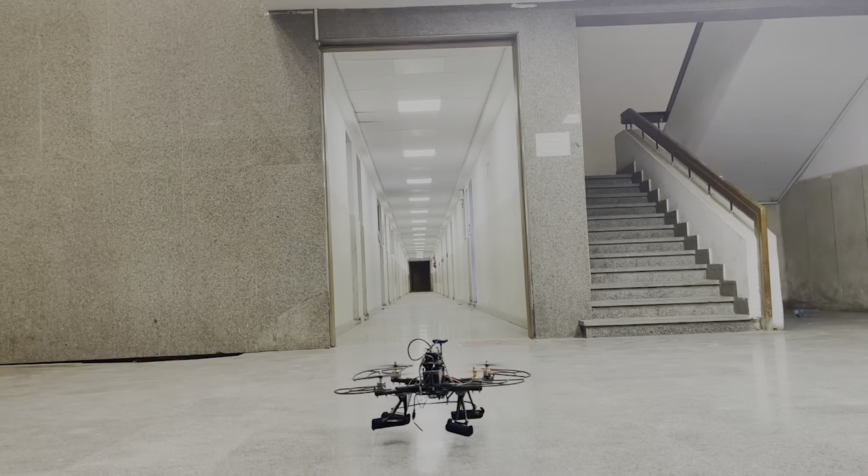I'm Abdul Ghaffar and I have the honor of leading ASU ROAR. As a part of ASU Racing Team, we have always challenged ourselves on the international stages, from Formula Student UK, Shell Eco-marathon, and Formula AI, where we explored autonomous vehicle technologies.

But curiosity doesn't stop. It grows, it evolves. It led us to robotics. That's where we built our ROAR. Behind every great mission, a great team, driven not by years of experience, but by belief, passion, and purpose. We may be young, but together we've built more than just a rover.

It's a vision. ROAR is made up of 6 tightly connected teams. The management team, overseeing planning, logistics, budgeting, and public engagement. The robotics team, focused on building our evolving manipulator and end effectors. The mechanical team, developing and validating the rover's structural and mechanical systems.

The electrical and low-level control team, powering and connecting all the rover's systems through PCB design, embedded control, sensor interfacing, and battery management. The autonomous system team, building the system of the rover by integrating computer vision, sensor fusion, path planning, and control algorithms into a cohesive autonomy stack.

Our newly formed science team, conducting field experiments for rock classification, pH analysis, and biosignature detection. The drone team, designing, assembling, and testing drone hardware while developing software for autonomous flight and mission programming. Each of us brings something different to the team, but we all share one mission: to face new challenges.

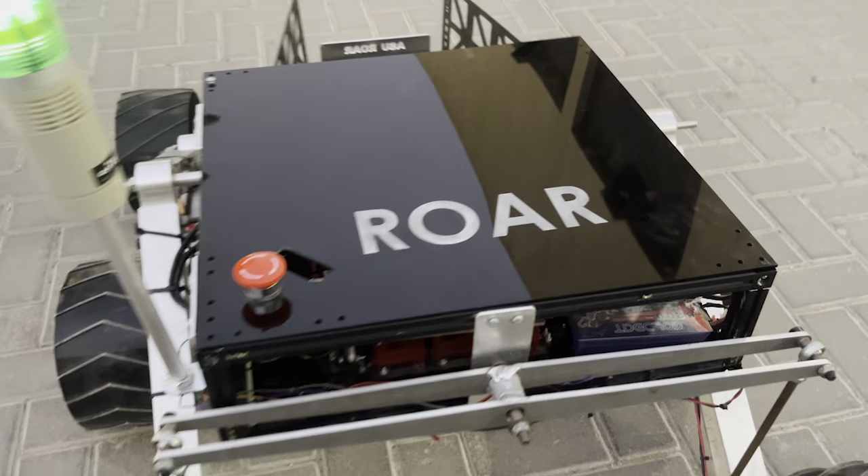That's why we found the European Rover Challenge, a competition that pushes us beyond anything we've done before. To us, it's more than just a competition. It's a chance to design a rover that's ready to take on the unexpected and to become one of the first Egyptian and African teams to compete on site. We're not just here to compete, we're here to collaborate, learn from one another, and stand among the best innovators in the world.

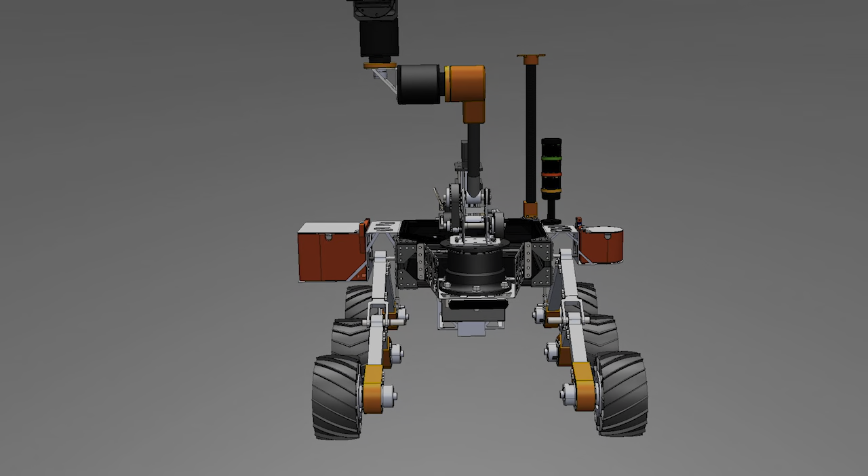Our mechanical system is designed with a focus on adaptability, practicality, and ease of integration. The structure uses a modular layout, letting us reconfigure the rover for each ERC task. The rocker-bogie suspension is used for passive terrain adaptation, helping maintain ground contact over rough surfaces without active control.

One of our main upgrades this season is our newly designed wheel assembly, focused on structural strength and durability, and is now ready for manufacturing. This year, we've added a new drilling mechanism and storage mechanism to be able to do all the ERC tasks. Altogether, the mechanical system reflects practical design choices and steady development, aimed at reliable operation at the competition.

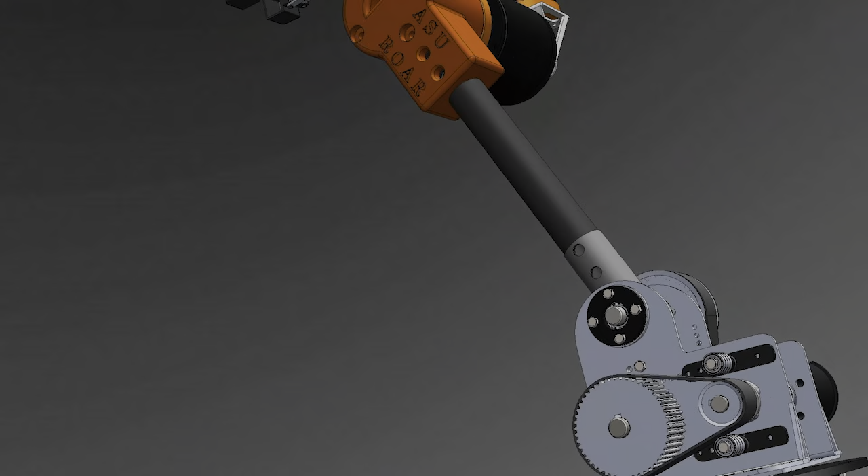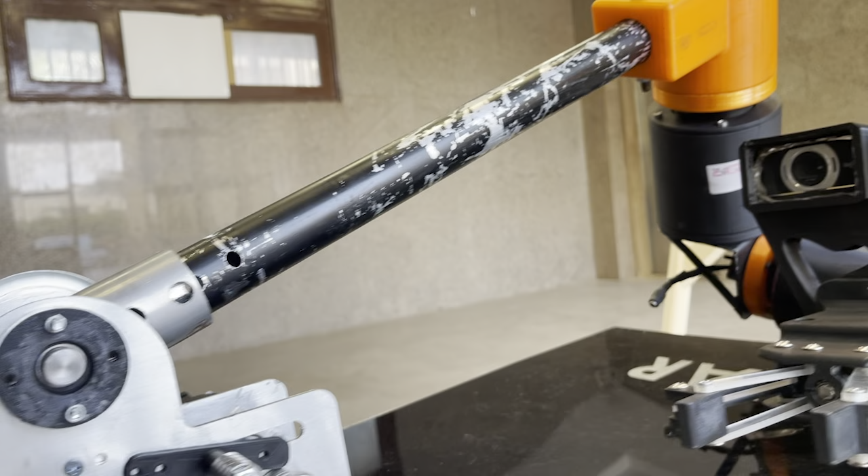From switches to rock and sand samples, every precision task relies on a capable, well-engineered robotic manipulator. Our 5 degrees of freedom robotic arm has come a long way since its original design developed last year. This season, we have re-engineered key joints for higher torque and improved stability, integrating cycloidal gears and custom double-stage belt drives with optimized gear ratios. These upgrades reduce backlash and enable smoother motion under load.

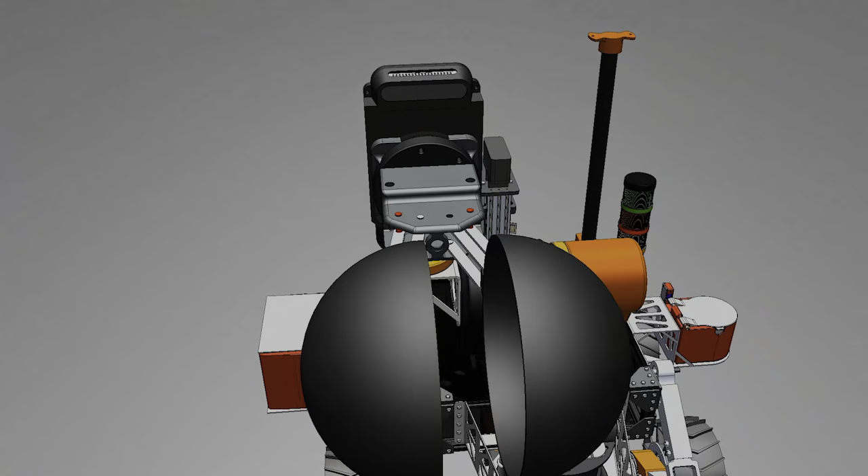To meet the varied demands of ERC tasks, we have designed modular end effectors that can be swapped quickly, enabling the arm to handle sampling tools, control panels, and scientific instruments with precision. Most of the components are being designed and manufactured in-house, giving us full control over tolerances, performance, and integration. The cycloidal joint is currently under active design and testing.

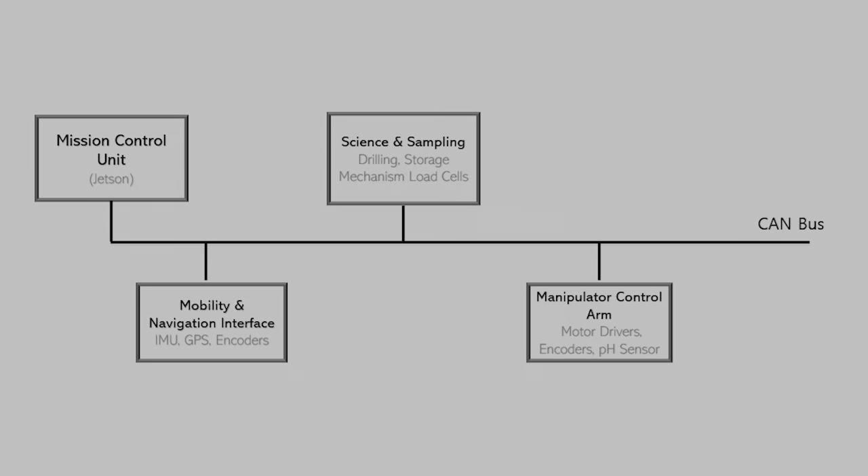Rover uses CAN-based architecture based on STM32 microcontrollers. Each node controls a specific subsystem and communicates over a shared CAN bus. Each subsystem is implemented on a custom-designed board. The boards are equipped with the necessary communication, power management, and control elements based on the subsystem's requirement. The layout was optimized for minimal noise and efficient routing.

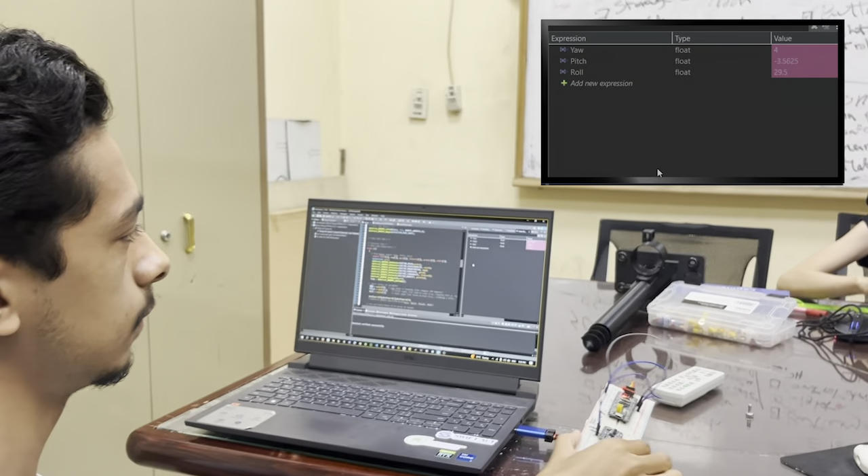Our system includes various sensors used for navigation, environment monitoring, and scientific tasks. We made sure each sensor is properly connected and tested under real-world conditions. Calibration was done to ensure reliable measurements, which is crucial for autonomous operations and task accuracy during the competition.

Power is supplied by lithium-ion battery packs managed by a smart BMS. Using a Bluetooth app, we monitor cell voltage, temperature, and state of charge in real time. The system ensures safety and logs any faults during operation or charging.

At ASU ROAR, intelligent navigation is key to mission success. Our rover is built to explore unpredictable ERC terrain efficiently, safely, and autonomously. It all starts with the A-Star Global Planner, which maps the most efficient path through required checkpoints, optimizing travel time and avoiding hazards. But ERC terrain is dynamic.

That's why our rover perceives its environment in real time. The ZED 2i stereo camera captures dense 3D point clouds, identifying rocks, slopes, and obstacles. This obstacle identification approach is model-free, relying only on raw data processing.

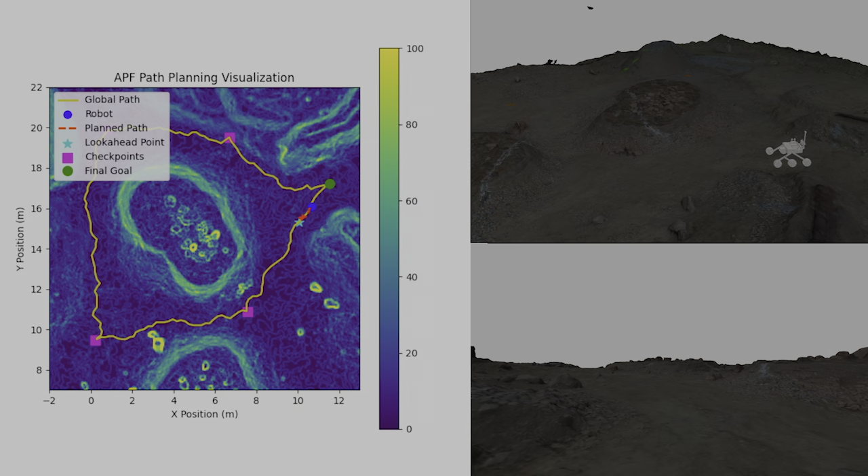This perceived data then powers our 3D artificial potential fields, which allows the rover to react instantly, navigating around unexpected obstacles without delays. Once a path is selected, our adaptive pure pursuit controller takes over, guiding the rover along its trajectory with precision and stability, even over uneven surfaces.

Reliable localization ensures we always know where the rover is. Our unscented Kalman filter fuses sensor data to deliver accurate position estimates, while ArUco marker detection provides absolute updates, which is critical for tight maneuvers and tight alignments.

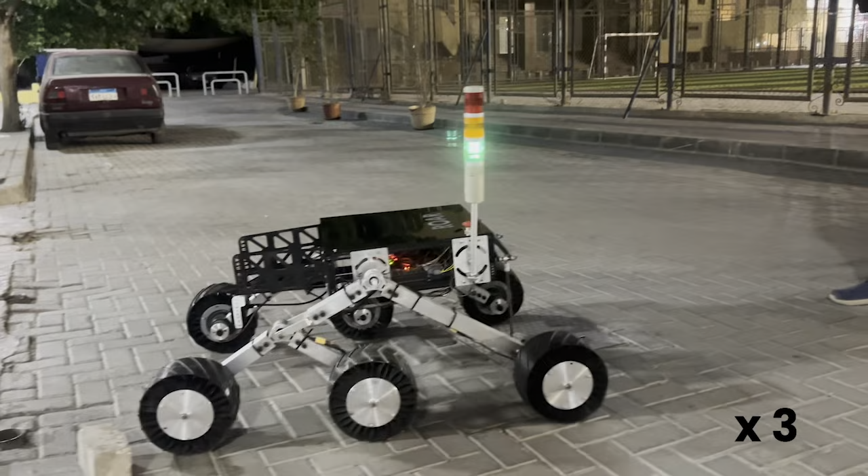We're currently working on a heuristic to find the best landing spot, both in terms of safety and scientific value, for the scientific exploration task for the ERC. We're also preparing for the AstroBio task by pre-calibrating our pH sensor to ensure it's ready for field use.

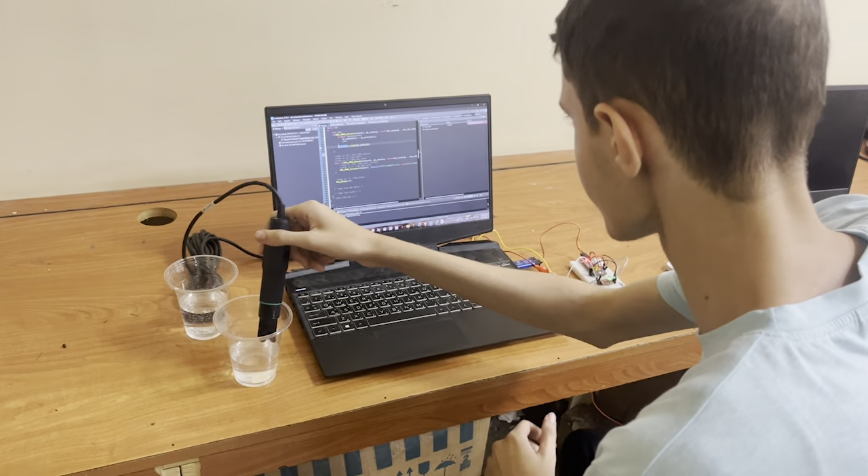Our drone is entirely designed, manufactured, and assembled in-house. The current frame is made from ACM, a lightweight composite of polyethylene sandwiched between two aluminum sheets. However, to further reduce weight and improve strength, we're shifting to a new carbon fiber-based body, also made in-house, starting from the layup process to produce a sheet which will then be CNC'd into the desired shapes.

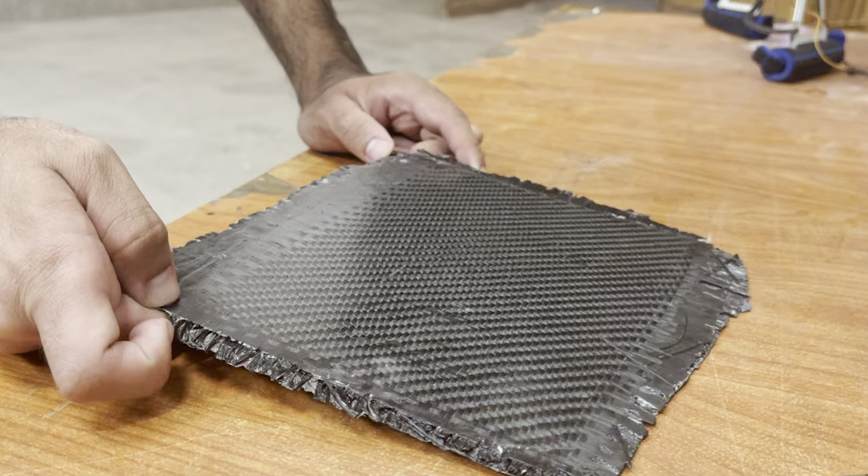The drone is powered by a Pixhawk 2.4.8 flight controller, which is integrated with Mission Planner, which is used for real-time monitoring, reviewing flight logs, and configuring flight parameters. It's connected to a Raspberry Pi, which runs our vision and detection software, and enables wireless communication with the ground control station via UDP using MAVProxy during flight.

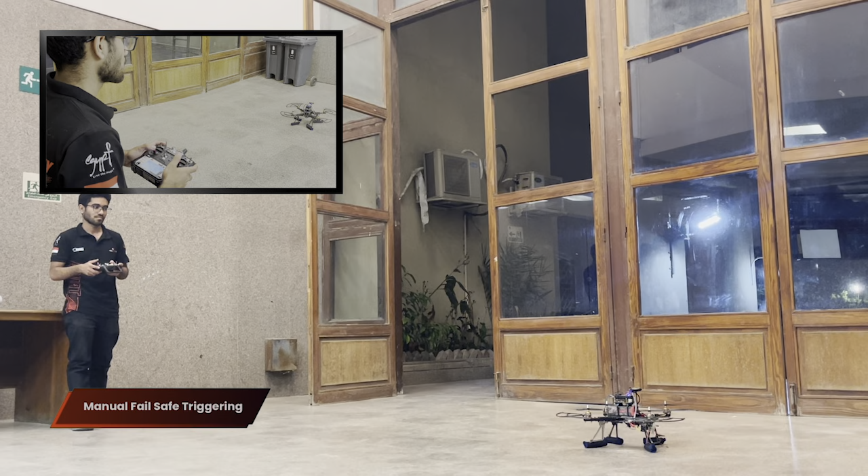Our BLDC motors are driven by a 4-in-1 ESC, powered by a 3DR power module. This module not only powers the system, but also allows the Pixhawk to monitor the battery level and trigger an automatic landing failsafe if needed.

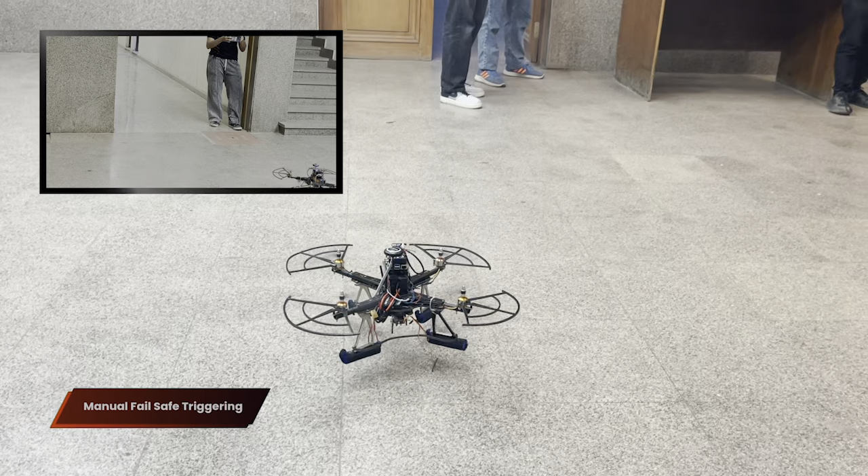For navigation and control, the drone uses a TF Luna LiDAR for altitude measurements, an IMU and compass for orientation, and a downward-facing camera for optical flow and ArUco-based pose estimation.

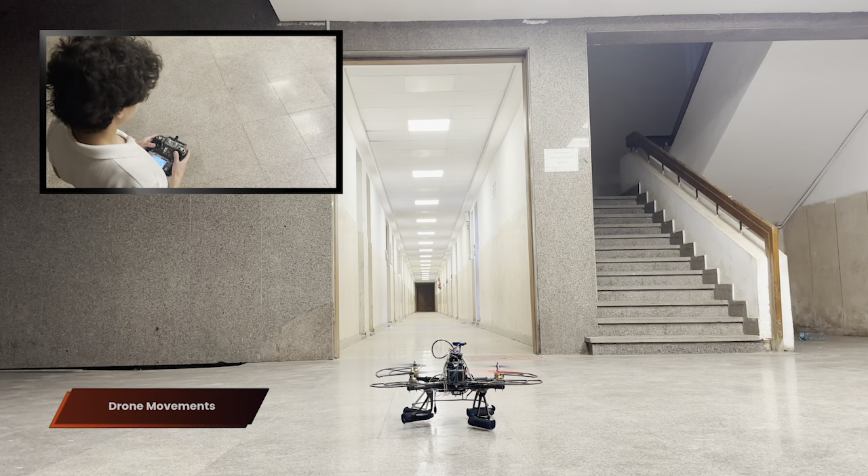The ground control station consists of a laptop running Mission Planner for live telemetry, as well as a FlySky RC controller as a dedicated emergency tool, allowing manual override or forced landing in case of emergency. This ensures robust control and operational safety throughout the flight.

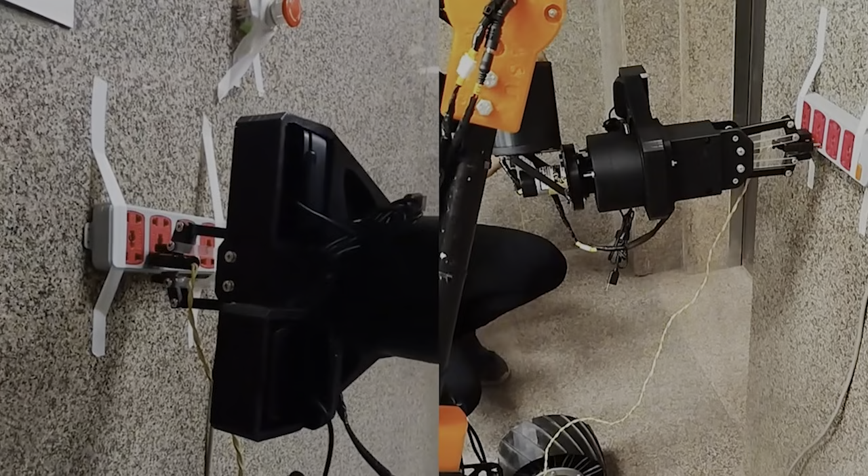We are developing the robotic manipulator's control system, implementing forward and inverse kinematics both in simulation using MoveIt and in real-world tests, ensuring the manipulator performs reliably across different scenarios like sample pick and place, handling plugs and switches.

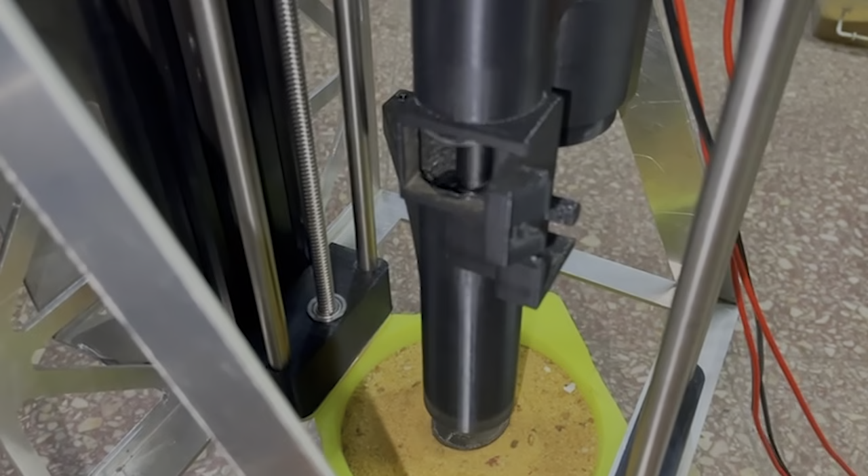Our storage system has a sample holder, a protective lid to protect the sample while navigating through the Mars yard, and a load cell to measure the sample's weight during collection. The drilling mechanism prototype is now complete and has been tested successfully. It showed stable and consistent motion with effective sand extraction during operation.